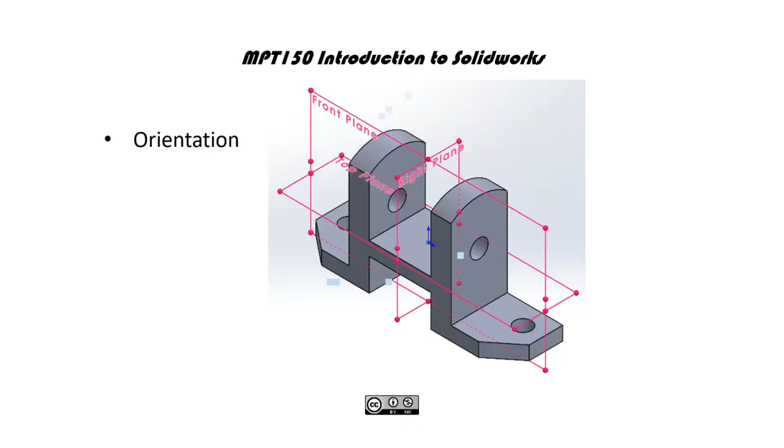All right, problem 4.8, millimeters, grams, and seconds. Part origin is located at the center, at the rib, or at the top of the cutout. This is a part that we've done quite a bit from the technical drawing books.

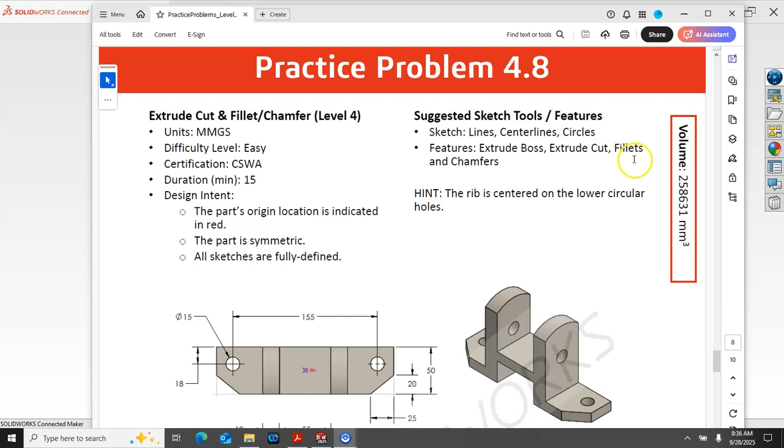Line, center line, circles, extrude boss, cuts, fillets, chamfers, and the rib is the addition, is centered and 8 millimeters high. So we'll use the rib command because we can.

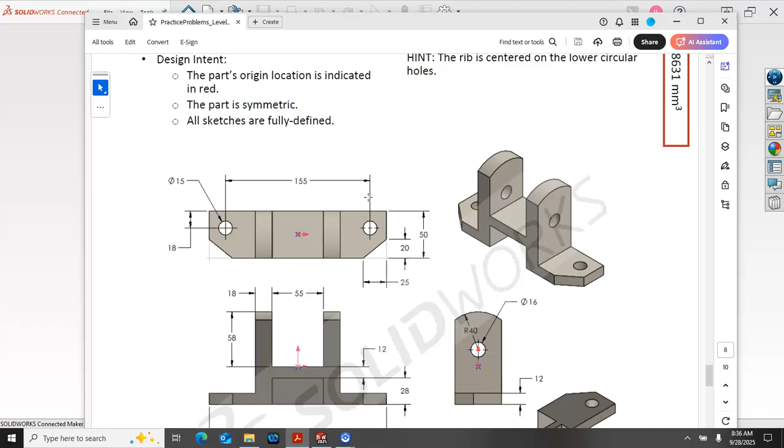Centered on the lower circular holes, so the 13 or 18 millimeters off of the edge. All right, so that makes sense. All right, so new millimeter.

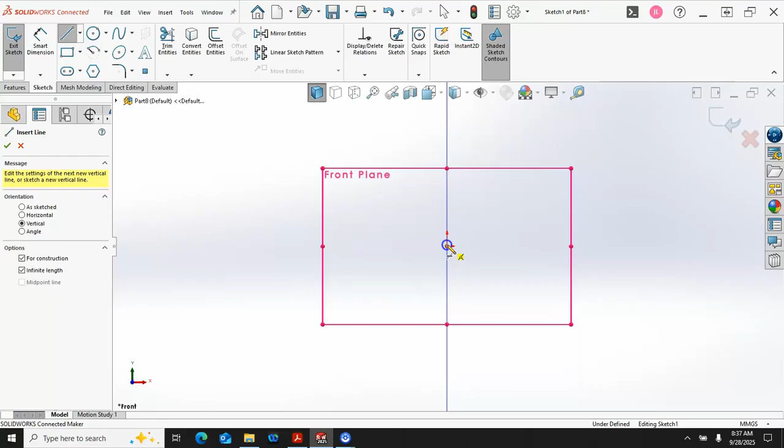We can start on the front plane, and we're going to make symmetry. So center line, vertical, infinite length. Let's see, this is an optional problem for our assignments.

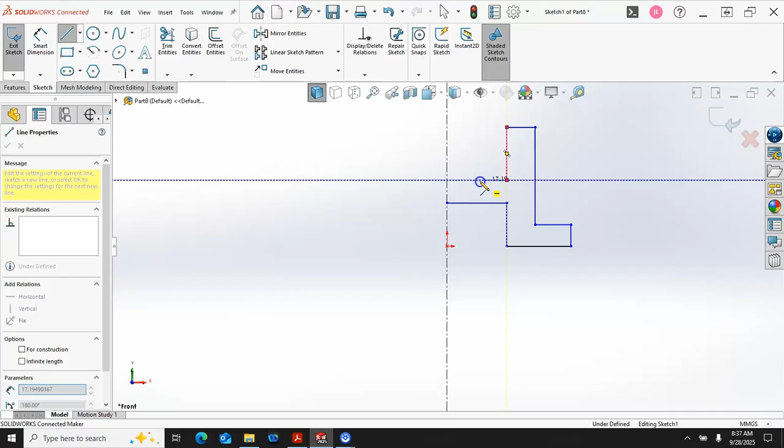All right, so I'm just going to sketch this out. If you are more comfortable with the geometry, let's see, that one's vertical. If you're more comfortable sketching some of the geometry and then adding the dimension, that's fine. That will certainly work. So we're given 155.

The overall length then is 190. And then the opening is 55.

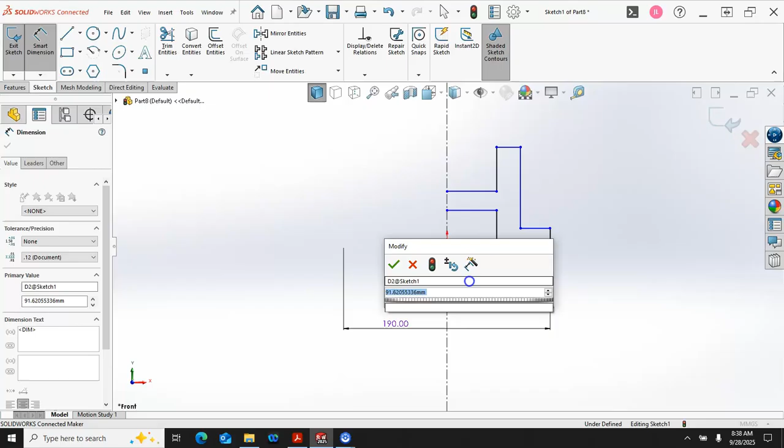All right, so notice that with the D, everything we select now is going to be in diametral until we hit escape. And then the rib is 12, and I don't really want the midpoint.

I try not to select midpoints. So that was 12 with an off the base of 28.

And an overall height. Let's see, we have to the center circle 40 and 16.

Oh, and after I did all of that, I still didn't get the relation. So let's get rid of that coincident relation. And I really needed to start the sketch there, which skews it a little bit, but not too bad.

All right, so our height then for this guy's 12. So when it does strange things, we're just going to work through it.

Mainly the strange thing is that I did the drag. And 18. All right, so we're getting there.

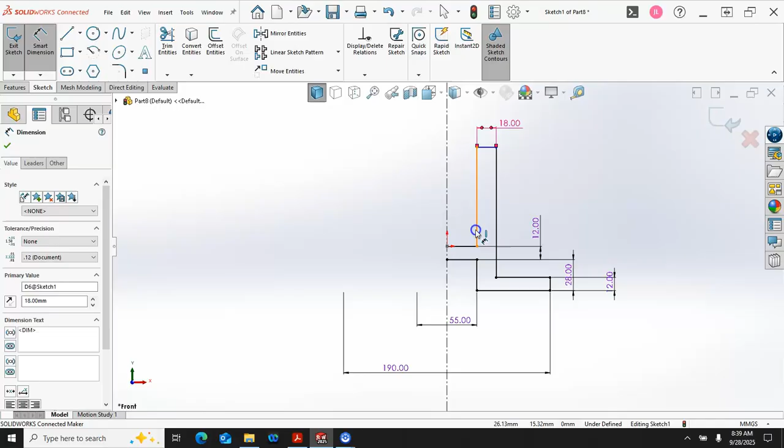58 to the top. All right, so yeah, I guess that that looks respectable.

So if I go right to left, it's going to get the center line with the crossing, and we can mirror those entities. All right, 18, 12, 12. That all looks pretty good.

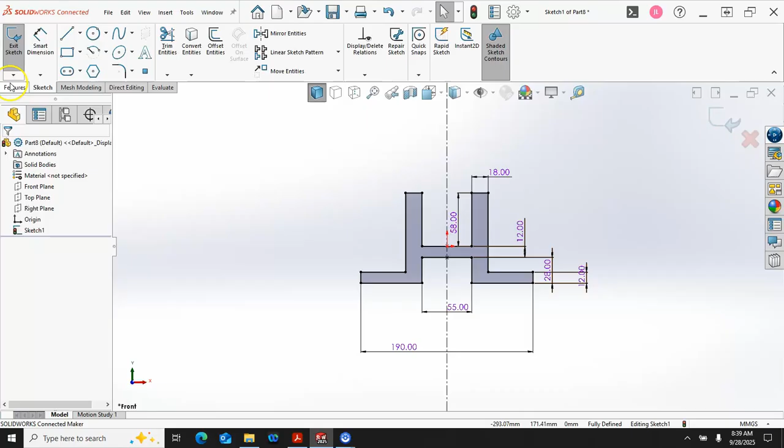So we are going to extrude midplane, and the distance is 50.

All right, so the hole location then becomes 40. Well, let's do the holes for the side first.

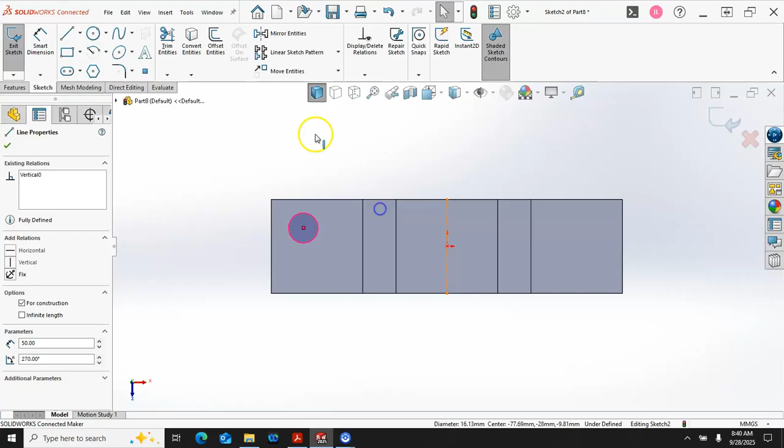Yeah, we'll go ahead and draw in the center line. Now, even though these are not continuous faces, they are on the same plane, and as long as they are on the same plane, it won't create any major issues.

It's if one of these gets a little thicker, a little thinner, that we would end up with geometry that doesn't quite complete.

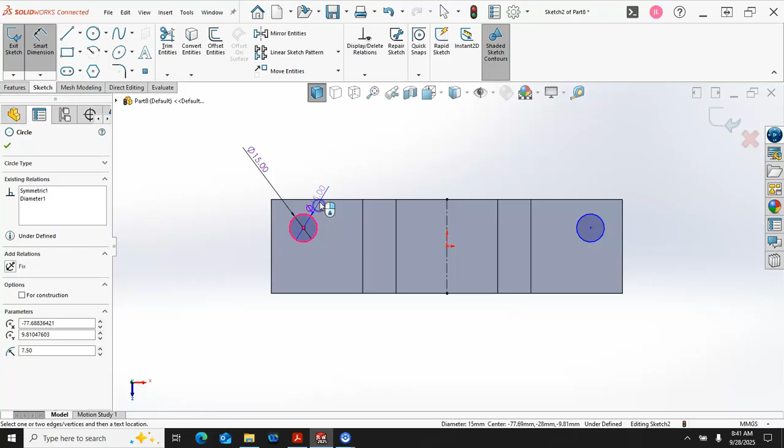All right, so diameter of 15, 18 off of the vertical, and that one's 25, 155 between.

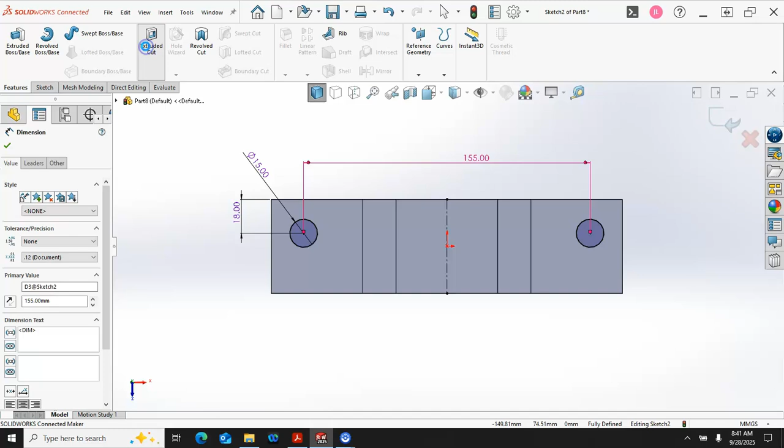All right, so 155, and then we can go ahead and extrude the cut, and through all is fine, so it makes those cuts. Let's see the hole then.

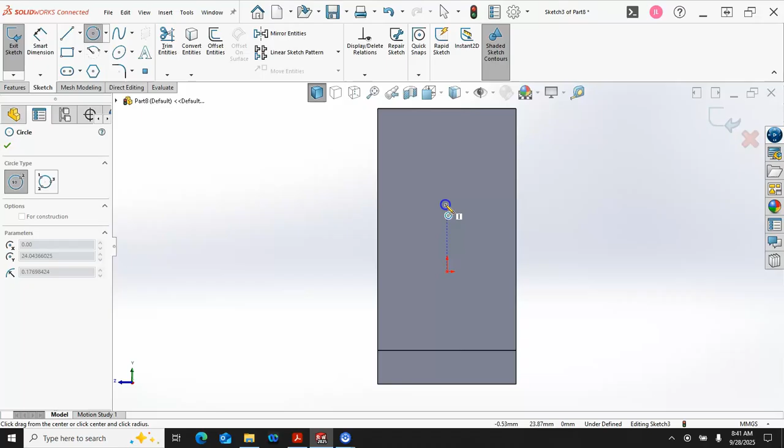Let's go with the circle. And then we have a couple of choices. I think this is another one of those places where we have the potential.

Oh, and I grabbed the wrong one, so let's hit escape. We'll go back in, make sure that I'm picking the right center point.

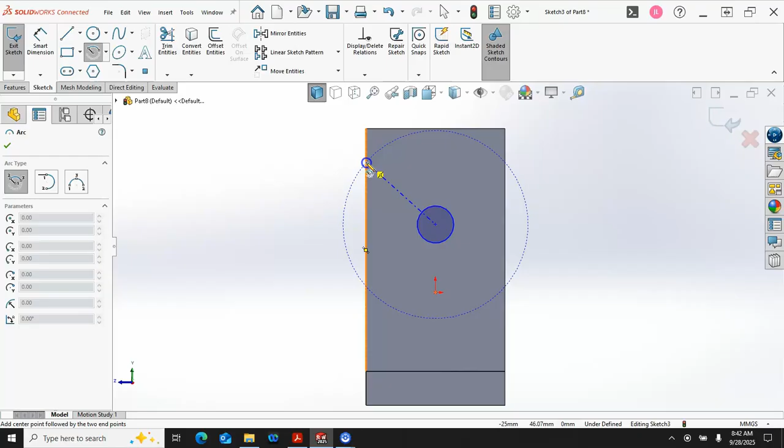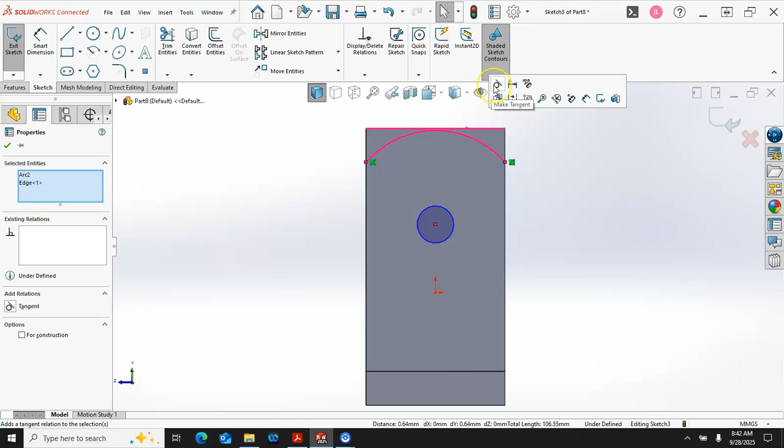a different sketch. So let's do that as an open and see if it works. So let's just concentrate on the circle, and we'll go to vertical. We have a diameter of 16.

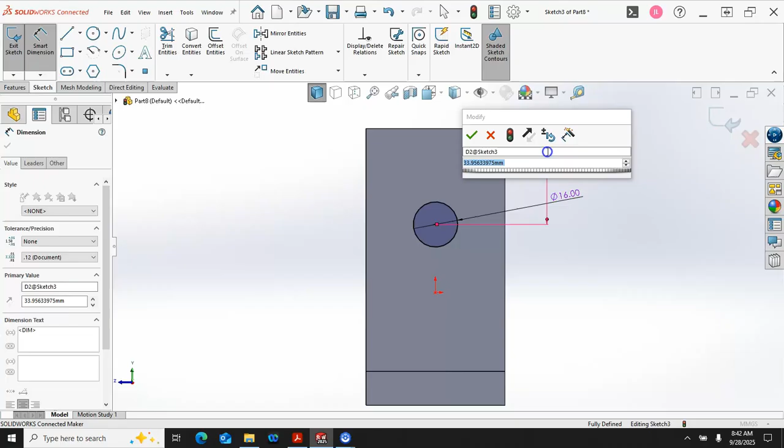Oh, that was right, 16, and a distance from the top of 40. All right, and this is going to be an extrude cut, and go to through all both.

Really all through all both is doing is activating direction 2 as a through all as well. All right, so we have that in place. Let's go ahead and open up the sketch.

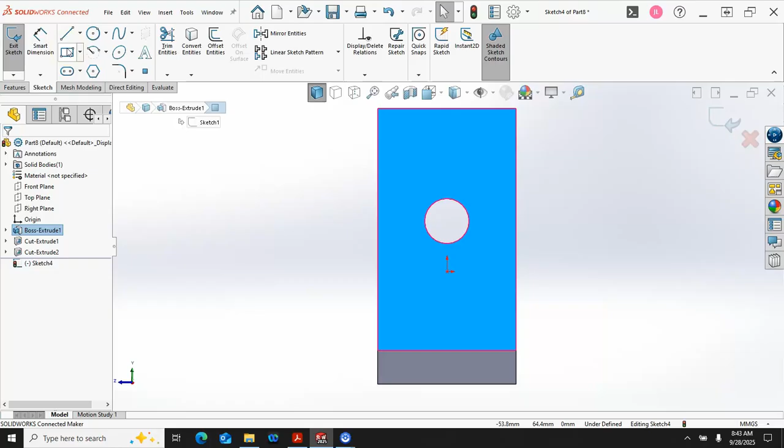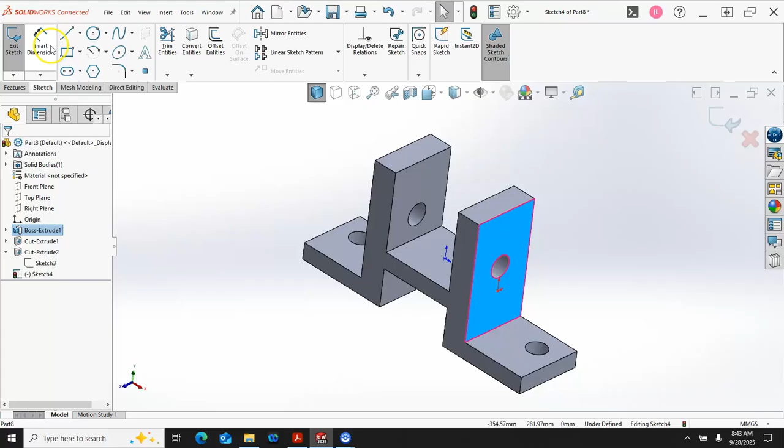I didn't necessarily have to do through all both there, I was thinking I was on the right plane. It didn't bark at me for not having geometry out there to cut. So if it does give you nothing to cut, I don't remember the exact error, but if it gives you an error that says cannot terminate feature, then just turn off direction 2 and make sure the through all is going the right way.

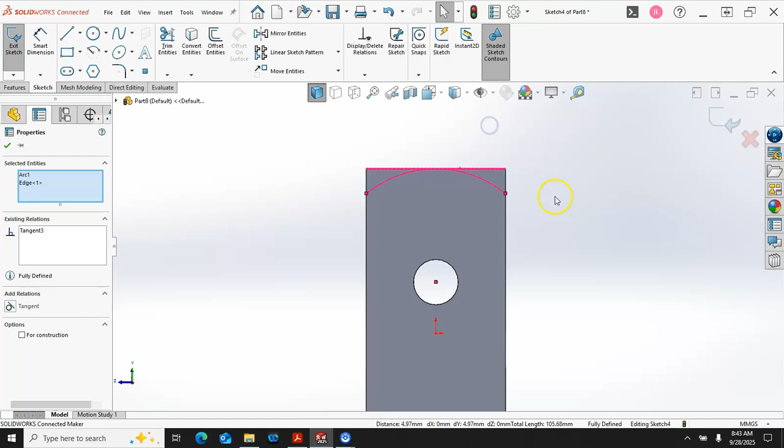All right, so let's do this, and we're going to go tangent. Because of the center point, we already have the 40. I am extrude cut, and it's showing the direction. So I didn't close this off, and it's showing the side to cut and the direction to cut. So I said we don't necessarily need direction 2, doesn't seem to be hurting anything, and it did it.

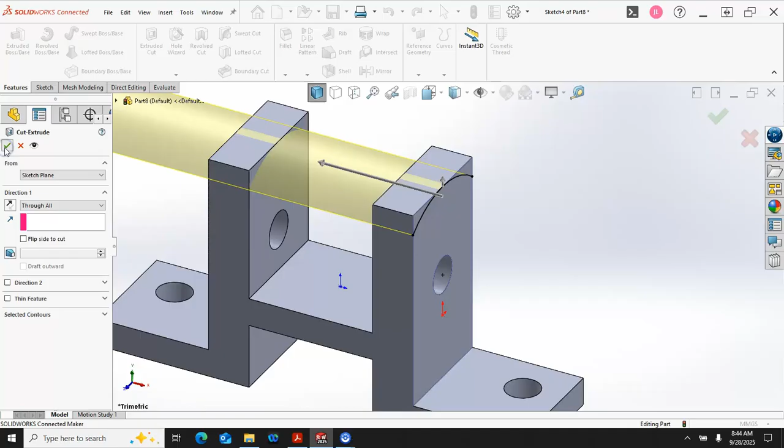All right, so there are times where we just want to be aware of the potential or the possibility that zero thickness can occur.

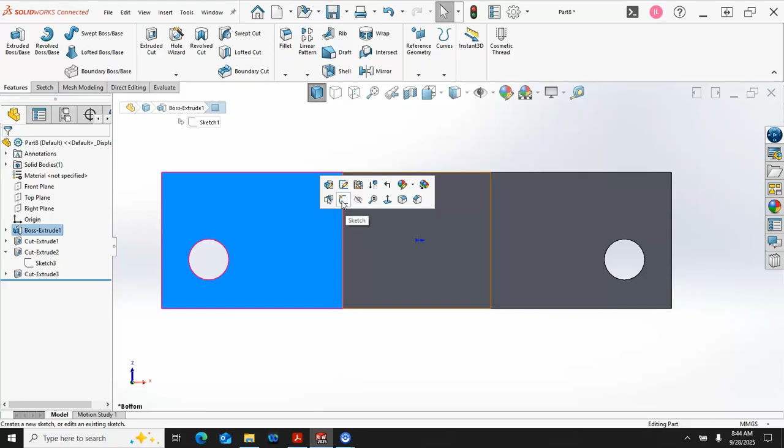So let's go with a rib. The rib will probably work better on the bottom face, and we're going to create a line, and it is centered on the circles. So we know that that's 18.

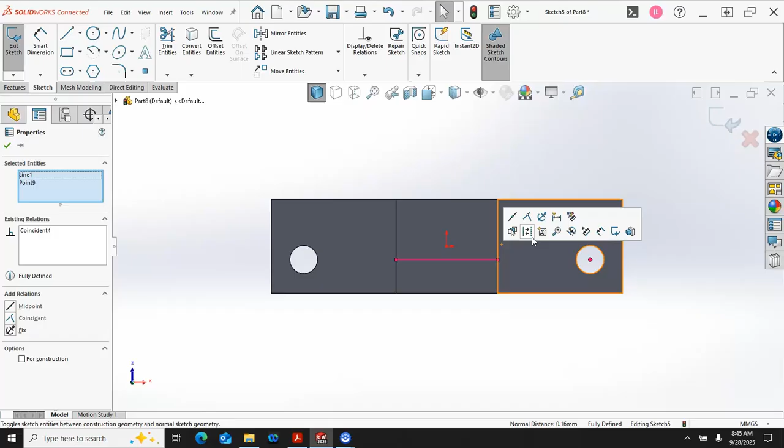Probably not going to get the point there, but very rarely get to use a point, so I can make those coincident. So we can use that as a construction point to align to the circles and say that this rib is always going to be aligned with that geometry. So now we have to find the rib.

Probably not. Oh yeah, features. It is showing up, so it has the geometry, but we don't use it that often, or at least in my line of work, we don't use it that often, but it is handy when it comes up.

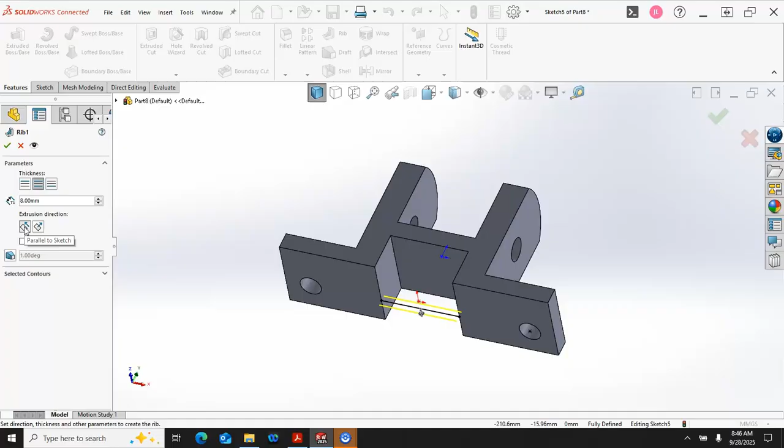All right, now our 80 was a little wide, so let's try 8. The thickness then is to one side, both sides, or the other side. So we do want this to be symmetric. The extrusion direction, let's see, parallel to sketch or normal to sketch. All right, so that changes our little arrow to be going that way. And then it is linear, and we go ahead and hit OK, and it fills in.

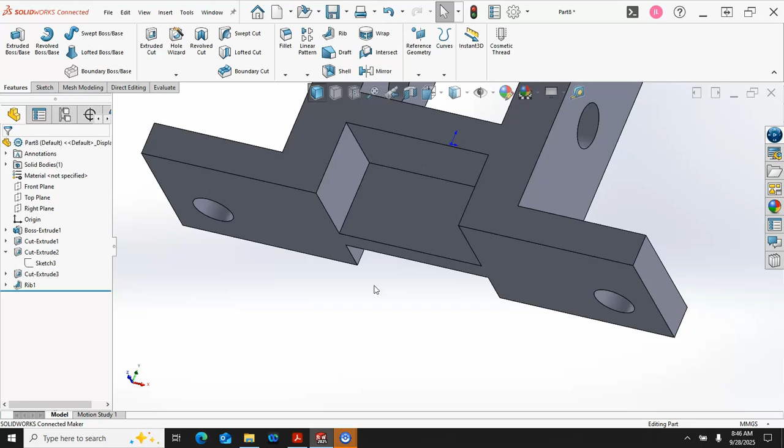How is that any different than drawing a rectangle and dimensioning and putting the midpoint relations? Not much, but it does introduce the rib feature as a tool that is available to use.

All right, so the last one are the chamfers. It is not a symmetric chamfer, so that means we're going to go distance and distance. Now, distance and distance asymmetric is probably going to create a problem on at least one of these. So let's go ahead and see what we get, and if it skews—no, that did pretty good.

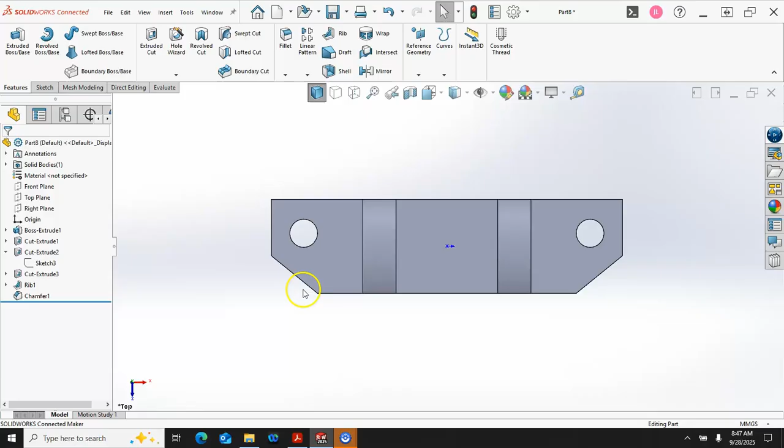But we do want to make sure to check, because this could have just as easily become the 25 and the 20 on that side. So if not, then we have to double check our directions.

I think that's all of the geometry, I'm not seeing anything else. So our number is 258,631. Let's go ahead and save.